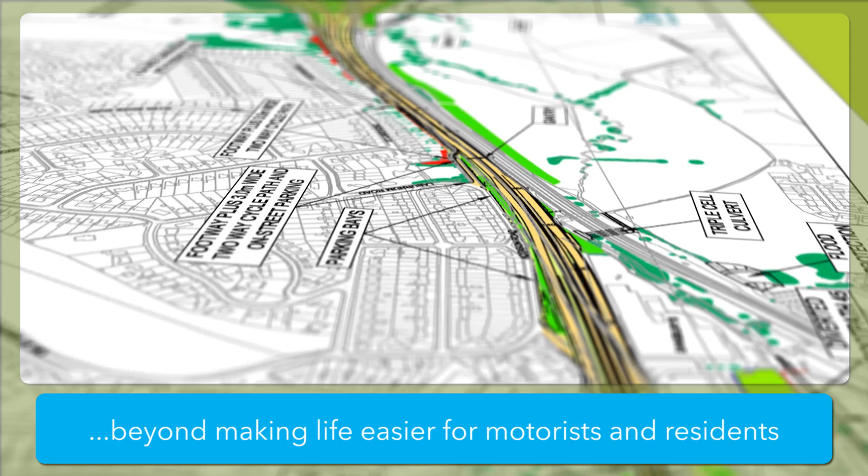Good transport networks are one of the keys to economic growth, helping businesses expand and increasing employment. Improving this key route is expected to lead to the creation of nearly 8,000 jobs in South Devon, with around 3,500 of these in Torbay.

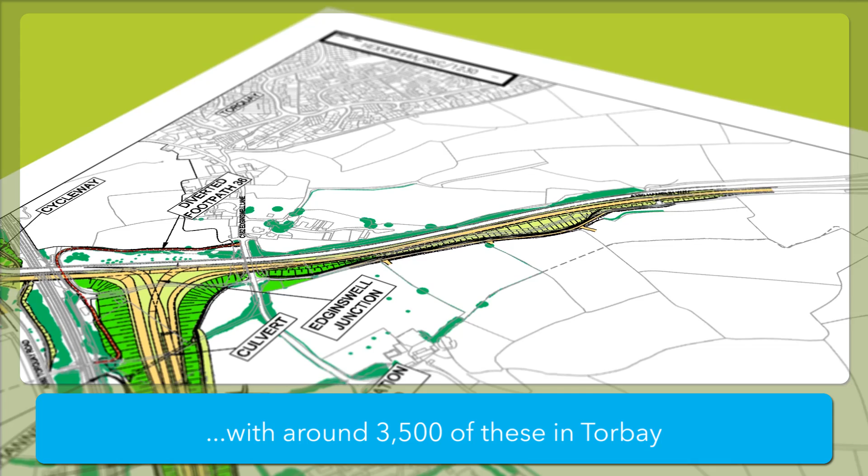The road between Newton Abbot and Torbay was a single carriageway travelling through Kingskerswell, a village with densely populated residential areas. It has always been one of the most heavily used routes in the region and was seriously congested, carrying over 35,000 vehicles a day.

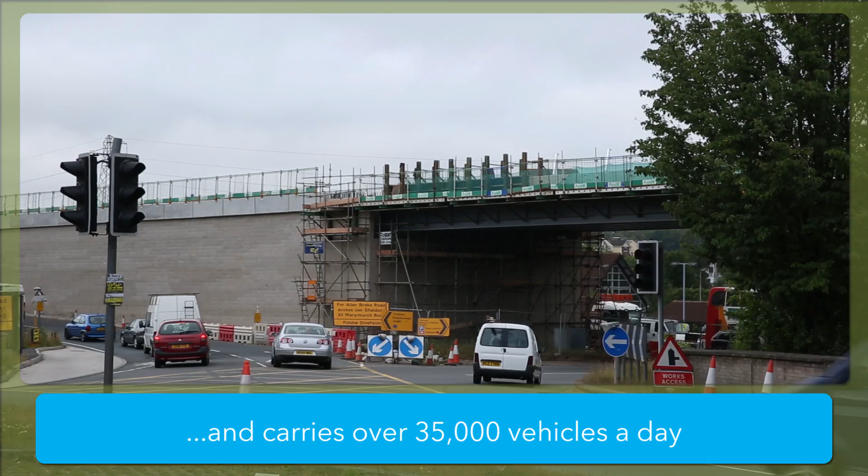Some residents of Kingskerswell and Newton Abbot were affected in a number of ways, including air quality, high noise pollution and road safety. Cyclists and pedestrians were at risk from the sheer number of vehicles trying to avoid the jams by using country roads that were only designed for light traffic.

Delays and unreliable journey times caused by congestion had an impact upon the local economy, meaning businesses were unable to make deliveries or attend meetings on time. As a result, some businesses moved away from the area, taking jobs with them.

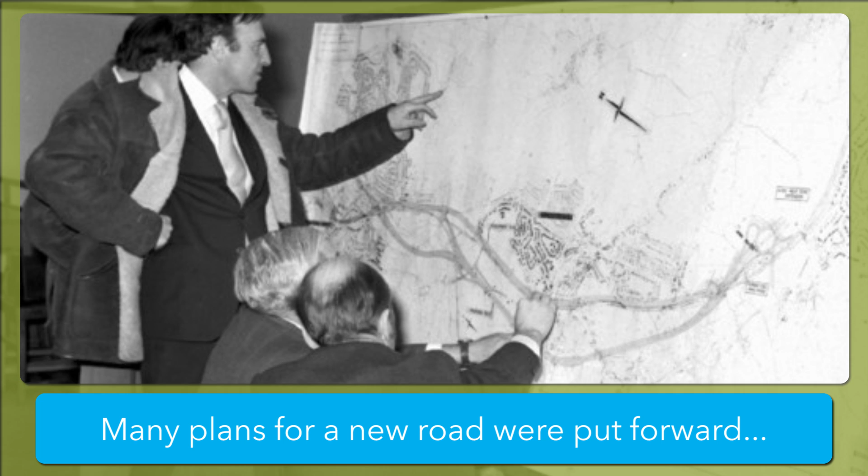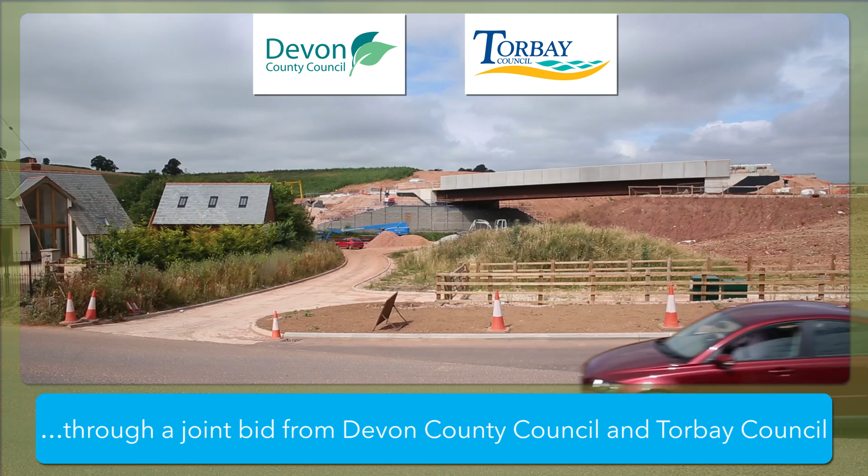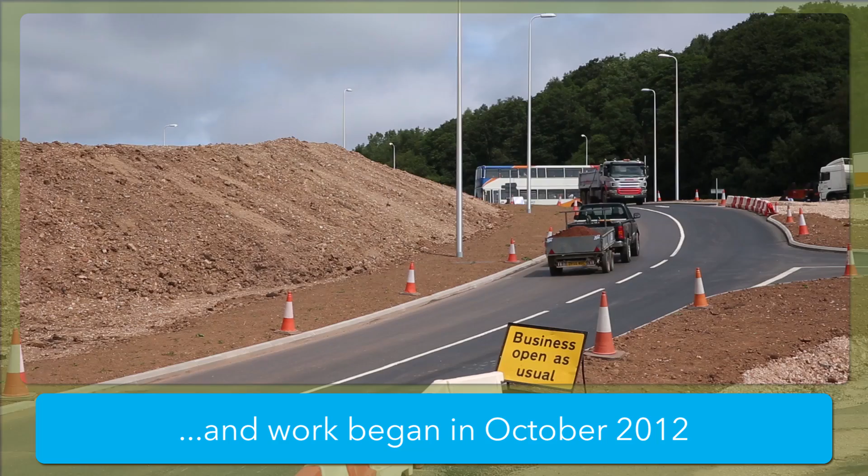The idea of a link road to bypass Kingskerswell was first discussed back in the 1950s. Many plans to get approval and government backing followed over the next 6 decades, until finally, in May 2012, full government approval was secured through a joint bid from Devon County Council and Torbay Council. The contract to construct the road was awarded to Galliford Try, and work began 5 months later in October 2012.

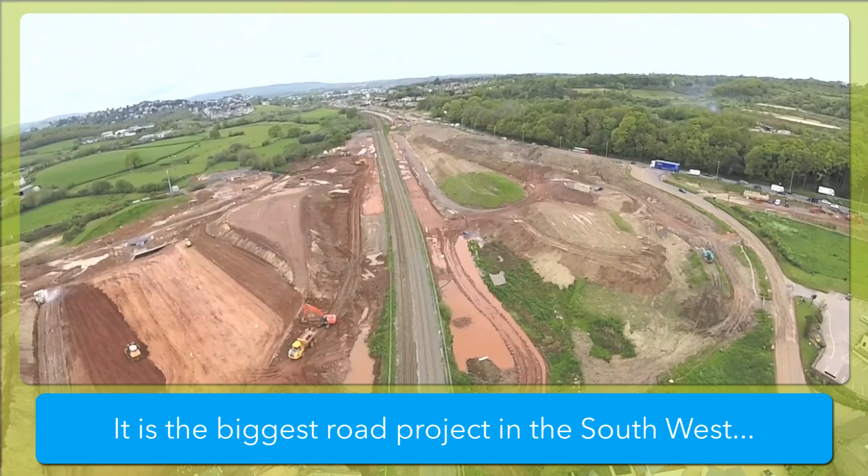The South Devon Highway has been one of the biggest construction projects and one of the most complex highway schemes in the South West, involving many partners and engineering challenges.

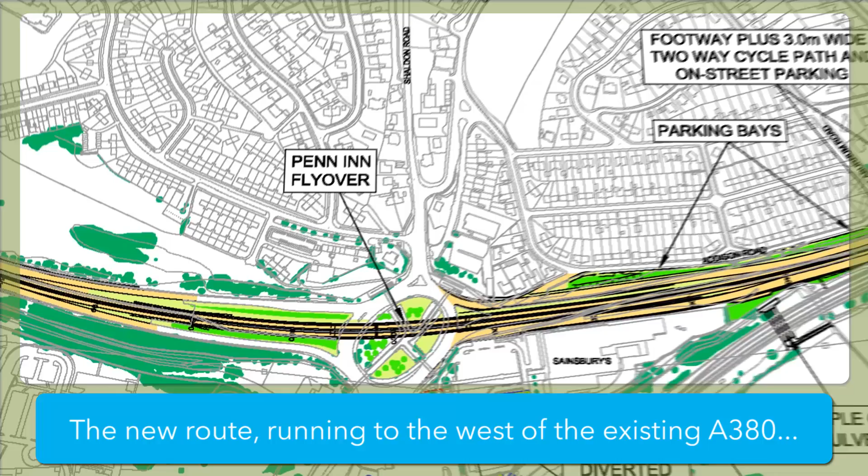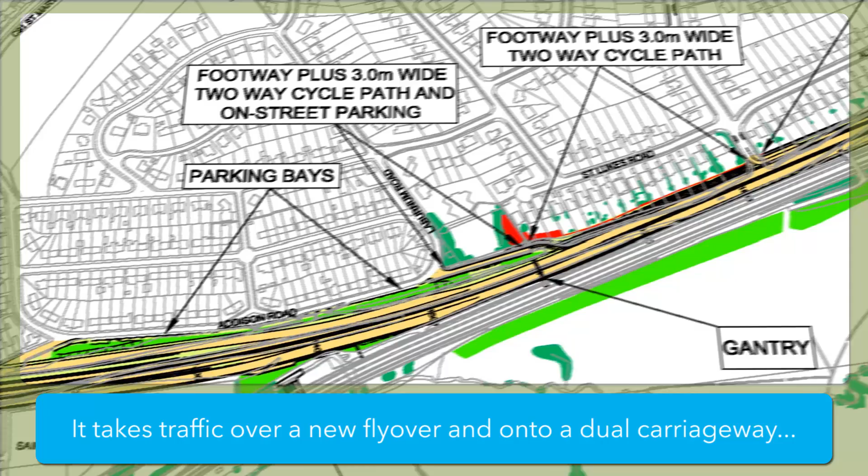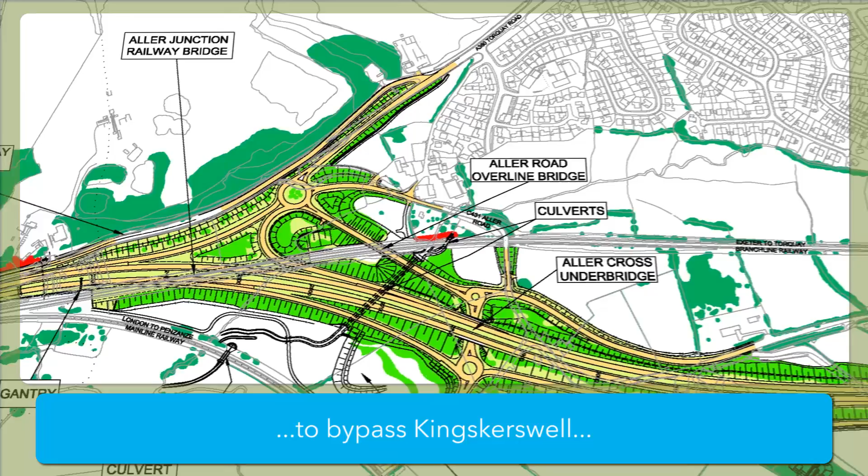The new route, running to the west of the existing A380 and bypassing Kingskerswell, starts just before the Penn Inn roundabout. It then takes traffic over a new flyover and onto a dual carriageway that was created by widening the existing road through Aller. The road then swings west before running in a southerly direction to bypass Kingskerswell, joining the Torbay Ring Road west of Kerswell Gardens in Torquay.

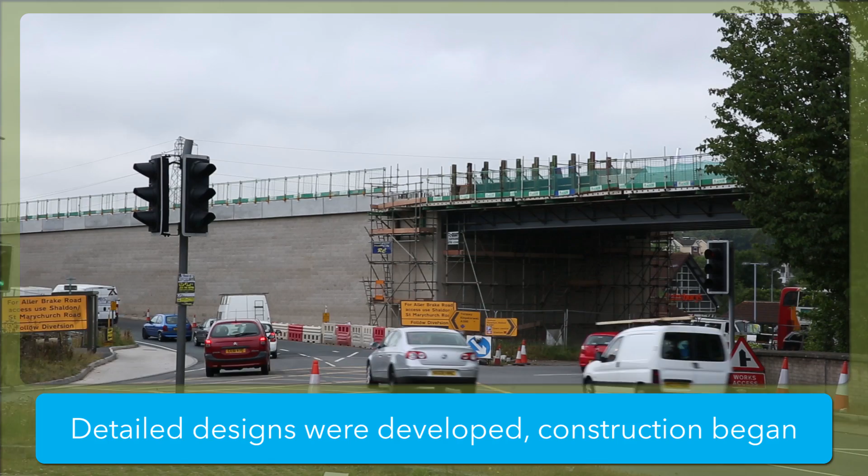On the 2nd of October 2012, the first piece of turf was cut. This was followed by a short period of site clearance and environmental mitigation, while the detailed final designs were developed and the construction of the new road began.

Archaeologists working in advance of the project made a number of finds. Artefacts dating from both the 2nd century AD Roman occupation and the Middle Ages were discovered near Aller Cross.

Throughout the project, concern for the environment has been key. Nearly 2.5 kilometres of newly laid hedge has been planted, with a further 0.5 kilometre of hedge transplanted from elsewhere. 38 acres of woodland has been created, alongside a programme of careful landscaping.

A range of designs to support animals, from badger tunnels to otter fences, and new spawning pools for fish were built. The site lies within a special area of conservation, specifically for bats. A bat house and bat boxes have been built to ensure they have suitable habitats and foraging areas.

64,000 trees and shrubs have been planted to encourage the bats to remain in the area. The net effect has been to improve the environment for many living things. Natural England and the Environment Agency approved all the measures and were satisfied that they met their stringent requirements.

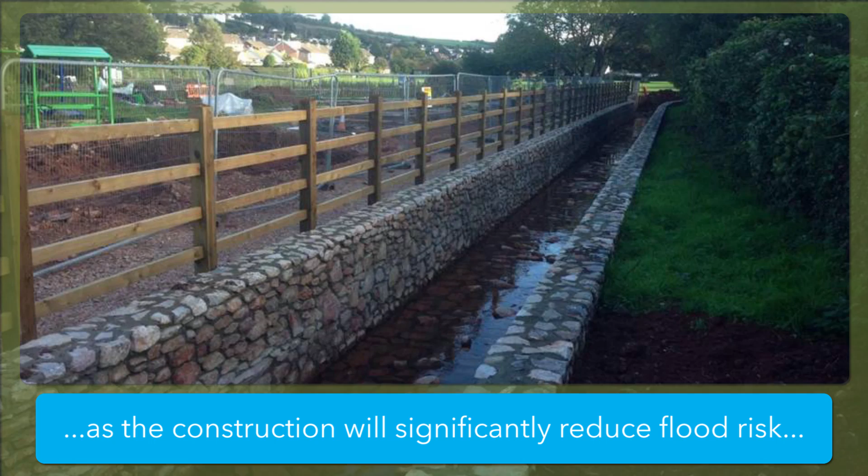The Environment Agency has been very supportive of the scheme, as the construction will significantly reduce the present flood risk for residents living close to the Aller Brook.

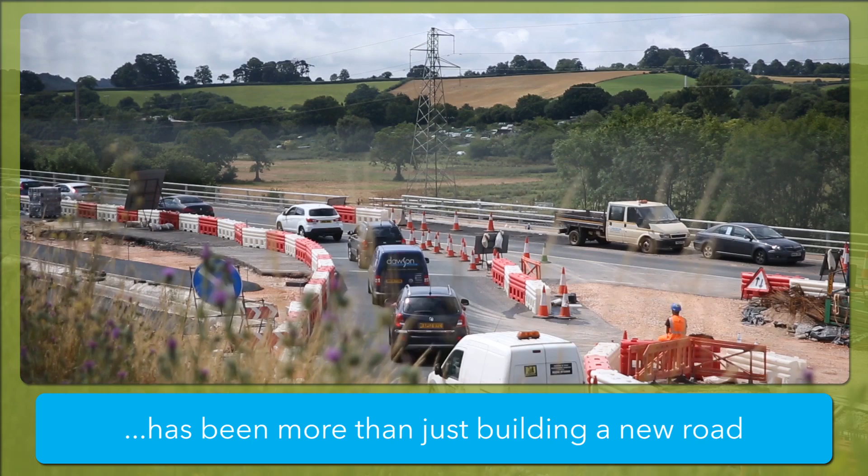Constructing the South Devon Highway has been about more than just building a new road. Along the route, 9 bridges have been built, as well as a 300-metre-long rail tunnel and a flyover.

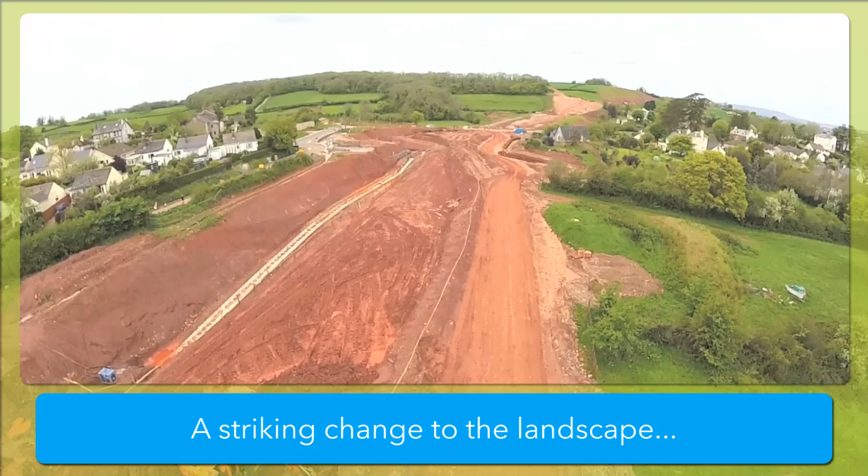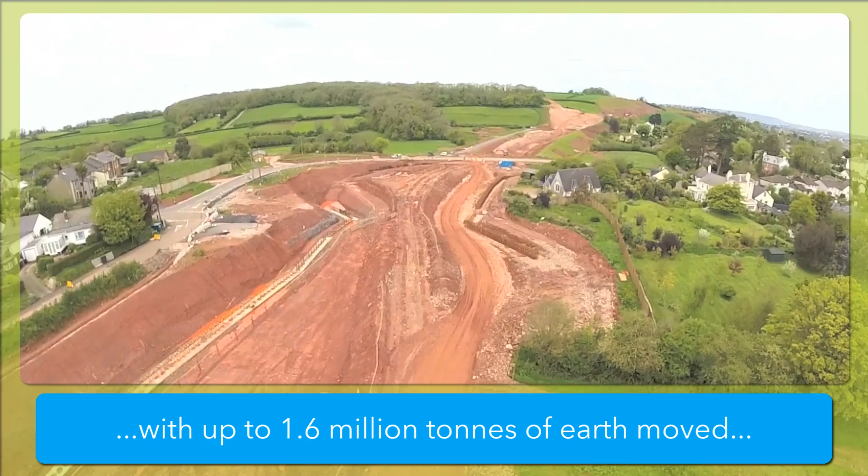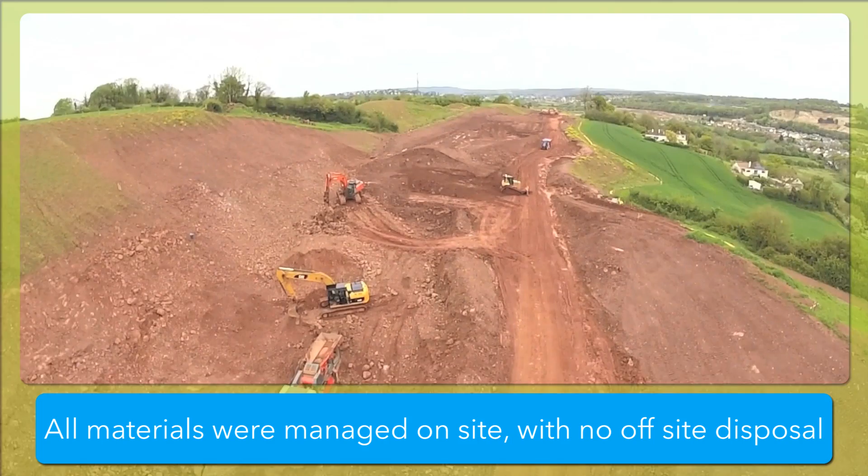One of the first striking changes to the landscape was the movement of earthworks throughout the 5.5-kilometre site. Over the course of the project, up to 1.6 million tonnes of earth had to be moved to provide the corridor for the new road. This was no mean feat and a huge engineering challenge. Throughout the works, all materials were managed on-site with no off-site disposal.

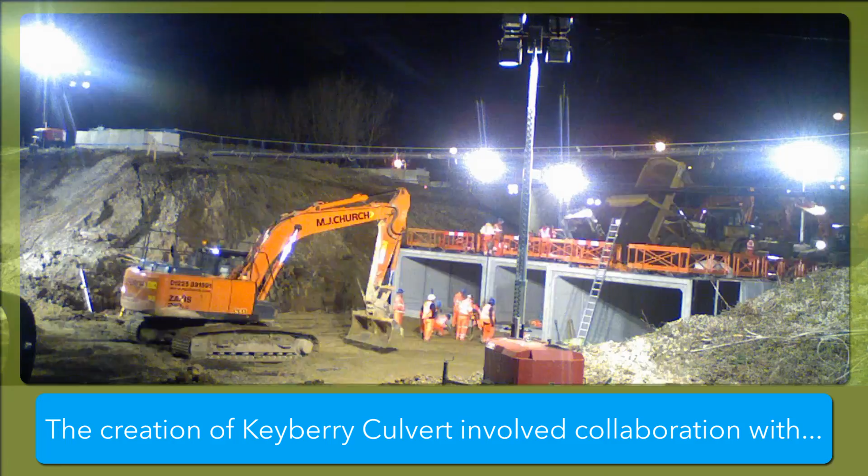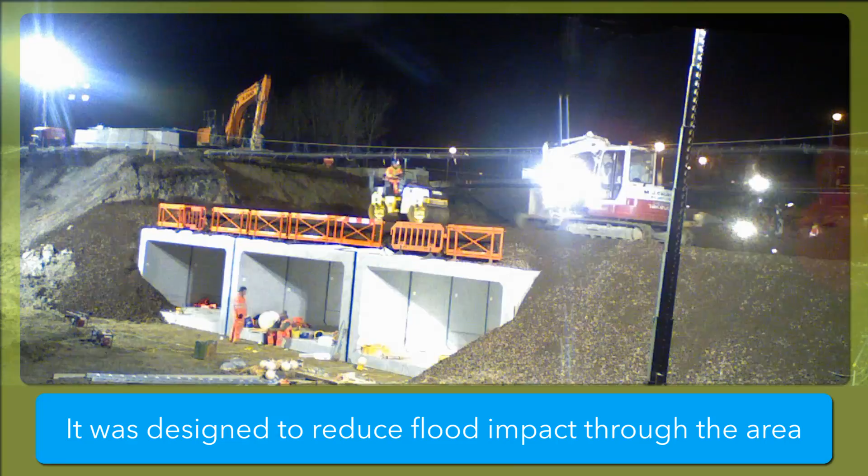While this work was taking place, preparations for 11 major culverts were underway. The creation of Keyberry Culvert involved collaboration with train operators, Network Rail and the Environment Agency. One of the main culverts, it was designed to reduce flood impact through the area.

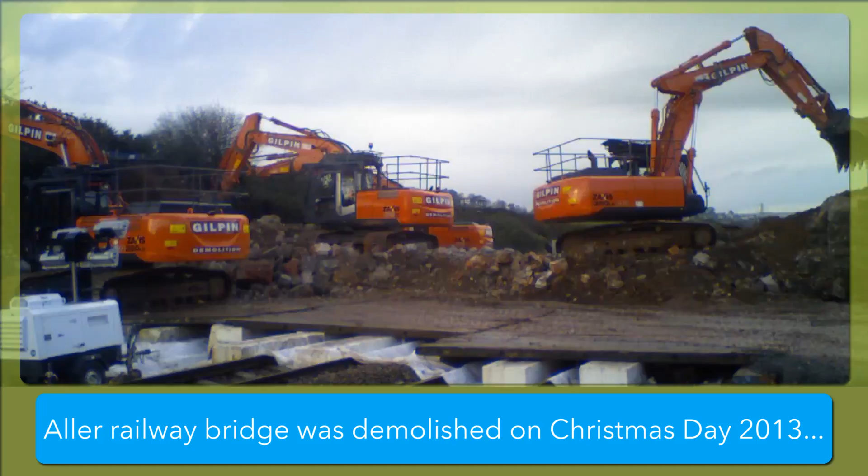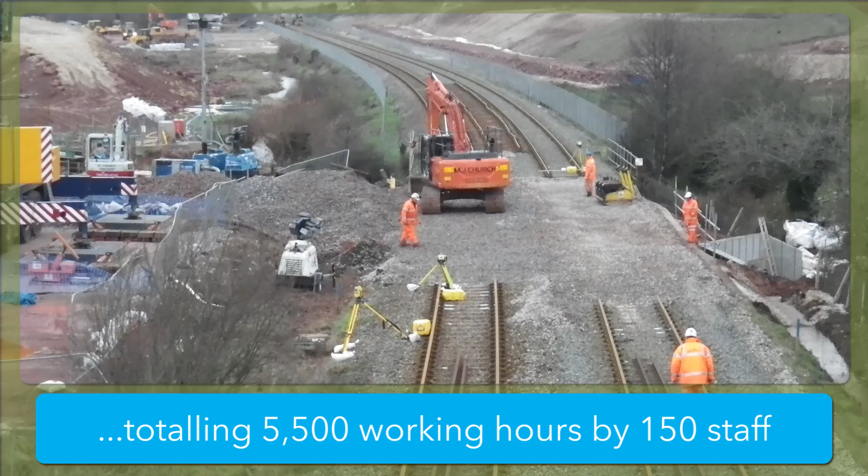One local landmark also needed to be removed. The railway bridge at Aller was demolished on Christmas Day 2013, alongside work that included the installation of 3 new culverts. The operation took place over 4 days and nights, totalling 5,500 working hours by 150 staff.

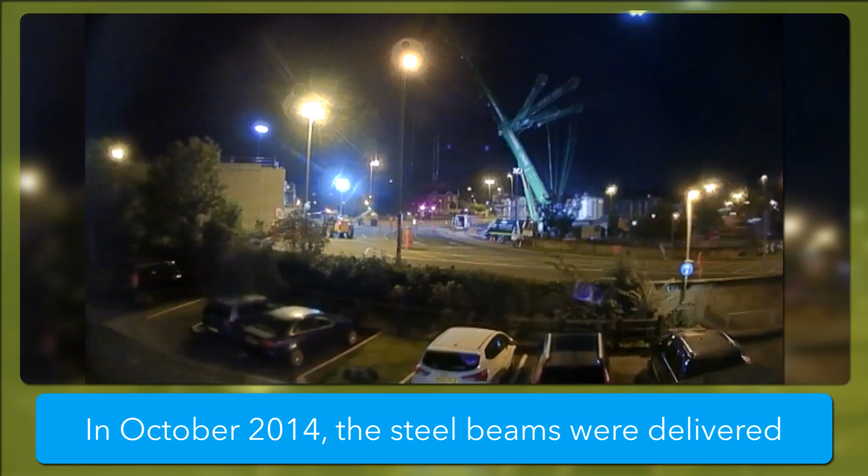The Penn Inn flyover was one of the most complex challenges for the South Devon Highway project. In October 2014, the delivery of the steel beams took place. In total, a series of 9 braced pairs were transported from Chepstow. The beams varied in weight and length. The largest, weighing in at 80 tonnes, was 53 metres long.

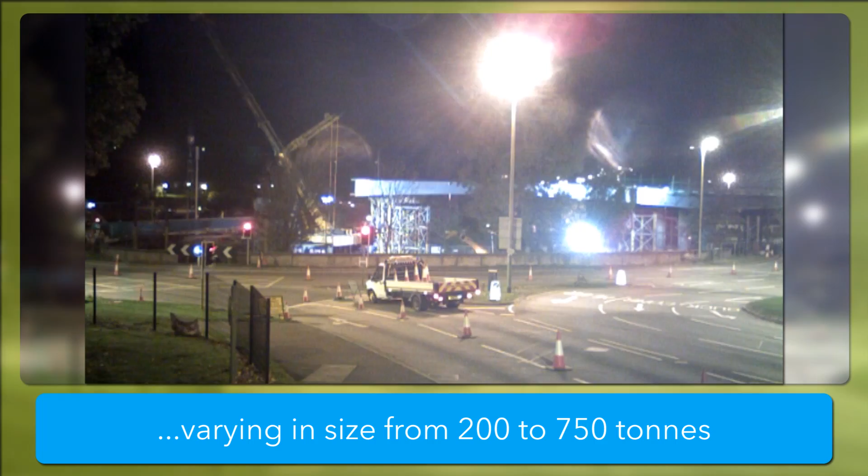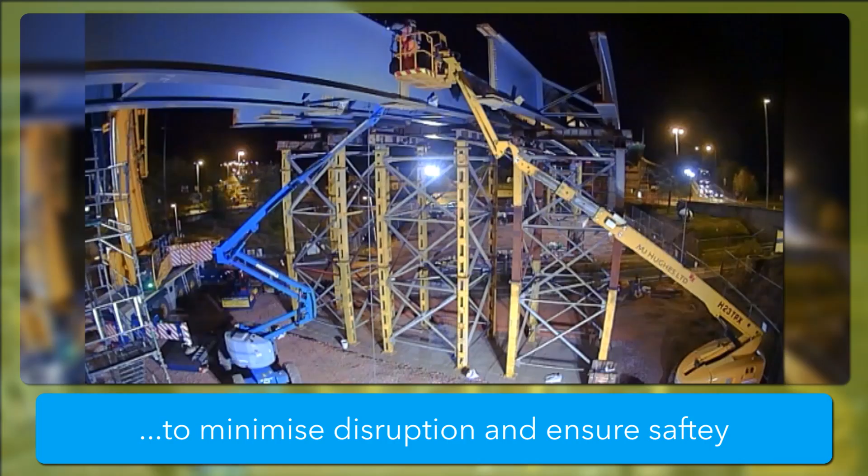3 cranes were used during the operation, varying in size from 200 to 750 tonnes. The beams were installed over several nights to minimise disruption to road users and to ensure the work took place in a safe environment. The installation of the beams drew huge crowds of locals who were keen to see the operation for themselves.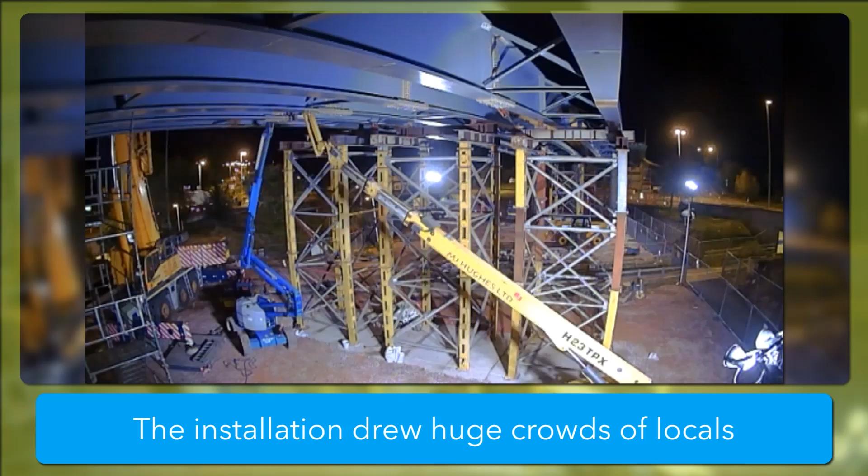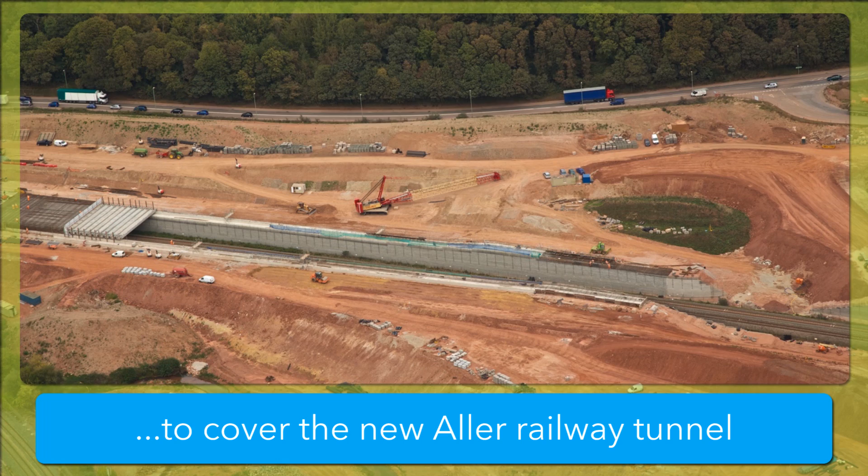On the 6th of September 2014, contractors Galliford Try began lifting beams to cover the new Aller railway tunnel. The tunnel takes the Torbay railway line underneath a 270-metre stretch of the new link road and carries road traffic over the railway.

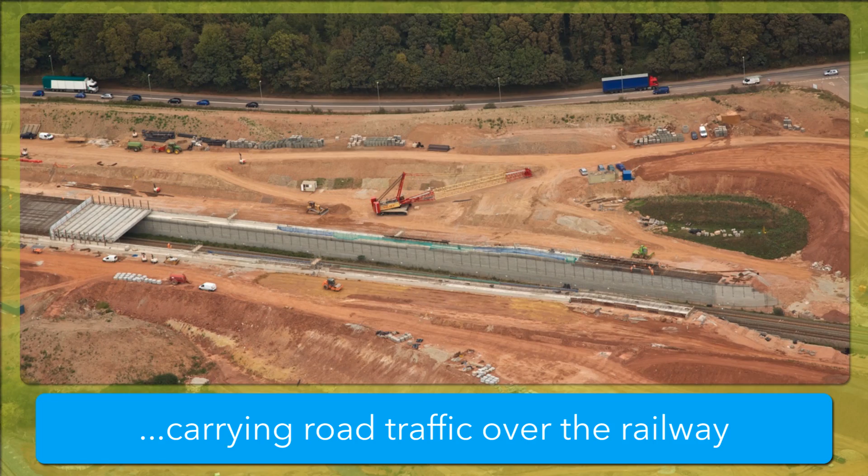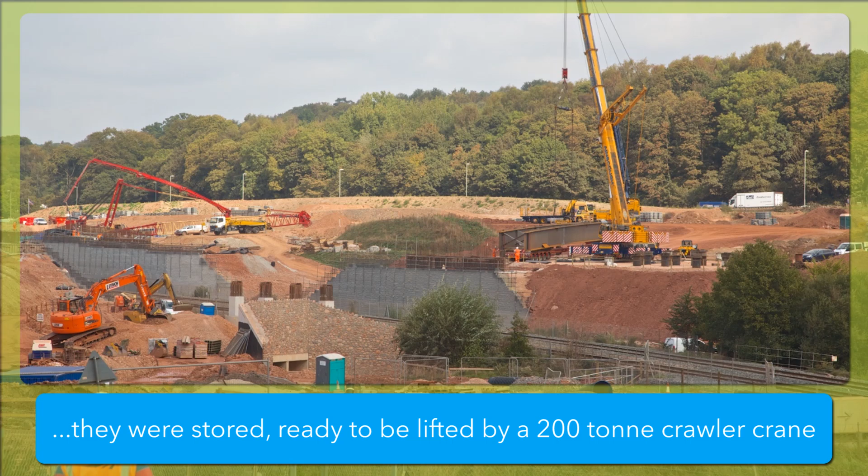The beams, which are 21.4 metres long and weigh between 31 and 34 tonnes, were brought in during normal working hours via the existing A380 and stored alongside the track, ready to be lifted by a 200-tonne crawler crane.

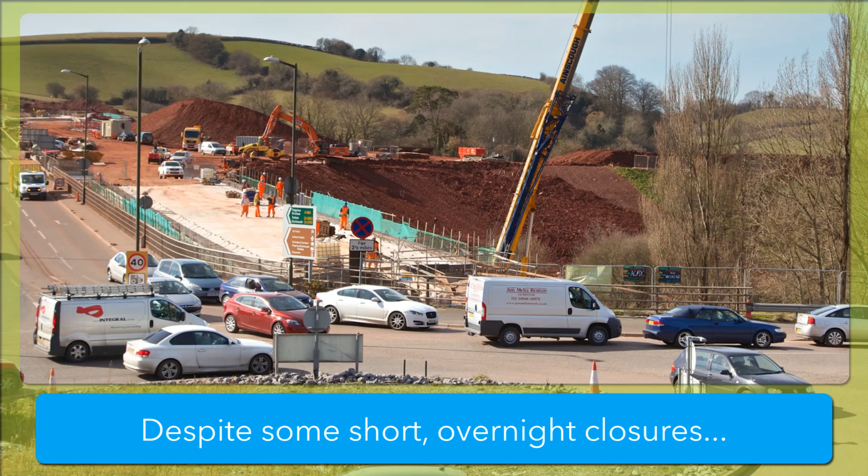One of the main achievements for such a big project has been the minimal disruption to traffic. Although there have been some short-term overnight closures, the main road was not closed for construction for any significant length of time. We made this short film in July 2015.

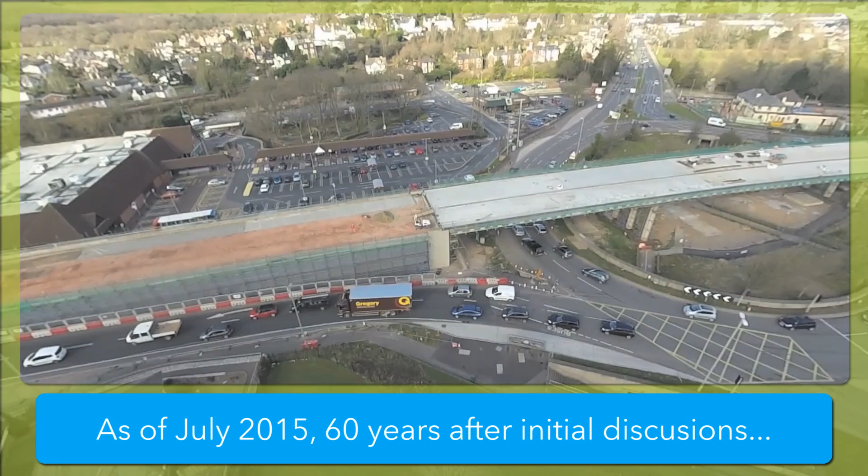At the time, over 60 years after the road was first proposed, the South Devon Highway was due to open ahead of schedule. A community day was held in July 2015 and was attended by nearly 3,000 local people.

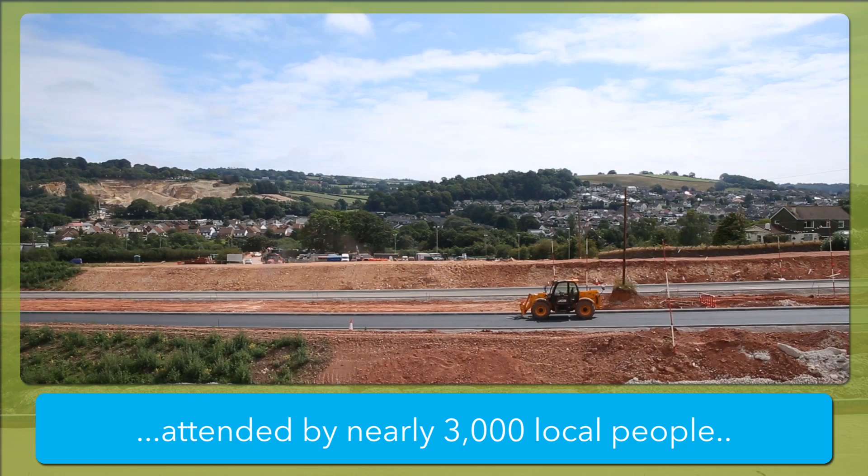The celebration of the new road is a way of thanking the community for their patience and of recognising the efforts of the project and construction teams.

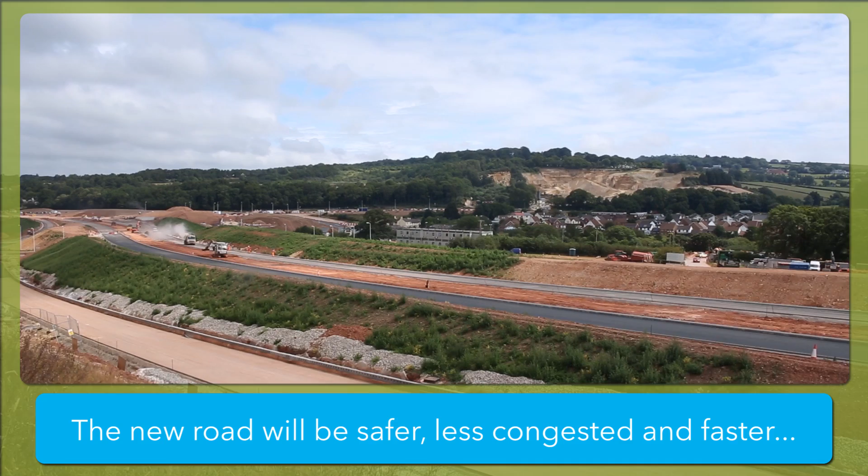In Kingskerswell, the old road will remain, providing a quieter way for local traffic and buses, cyclists and pedestrians, while the new road will be safer, less congested and faster, taking up to 95% of traffic away from the village.

The South Devon Highway has been a hugely important project. It will not just restore the village of Kingskerswell, but will revitalise the whole area, supporting economic growth, creating jobs and increasing prosperity. We wish everyone that travels along the highway a very safe journey.